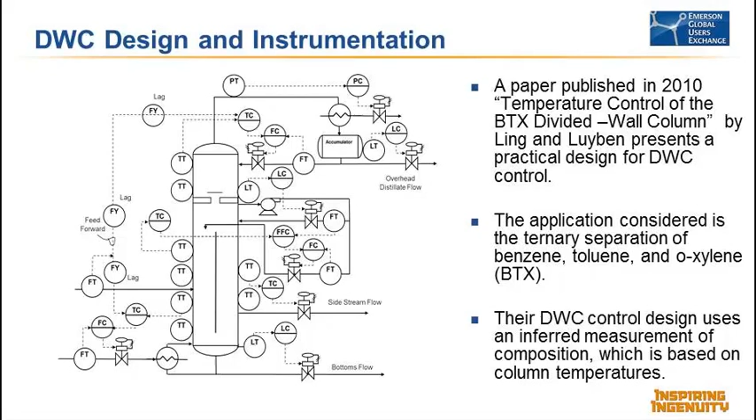For our column, it's about 28 stages, and luckily, we were able to have temperature transmitters on 19 of those stages. We will not use all of them, but we have the flexibility to change very quickly and effectively which stage we'll be controlling off of. So it'll be a huge control study. We've done preliminary looking at which stages we'll want to control off of, but we won't really know the results until we're actually able to run the column.

We'll be using model predictive control on our column. So like I said, by having the wall, you add additional degrees of freedom. So one of the most important stages in the divided wall column is actually the split. So here you'll want to call the column the pre-frac side. So this is where the feed comes in. And then this is the main frac side.

So the side stream product shown here is coming out here. So you have your A product, B product, and C product. The idea behind this wall is to separate the feed and be able to take out the side stream. And so you actually don't want to do the split 50-50 at the top of the wall. We don't know what the ideal split is, but done in modeling, it's about a 25-75% split. But this split is very important for us. And so that's one of the manipulated variables we'll be looking at.

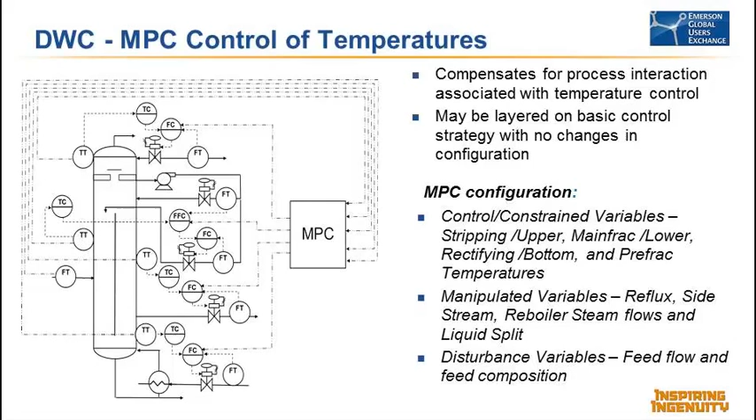So normally you manipulate the reflux at the top of the column, the reboiler steam flows, and then our liquid split, and then the side stream, how much we'll be pulling out here. So it's imperative to have an effective control just because each of the variables interact with each other. And for my project, we'll be looking at the steady state, but further down the line, we'll actually be looking at disturbance variables. So we'll change the feed flow and the feed composition.

Here's a rough flow diagram of what our divided wall column looks like at the pilot plant. It's a 6-inch column, about 30 feet tall. When you have in industry a column that's much larger, you're actually able to internally do that split at the top of the column. But unfortunately, with a 6-inch column, we're just not able to control that liquid level. So what we're doing is we have a total trap tray in the column. So we'll be pulling all the liquid out and putting it into a vessel and pumping that through a heat exchanger just so we'll return the liquid back to the column at the same temperature.

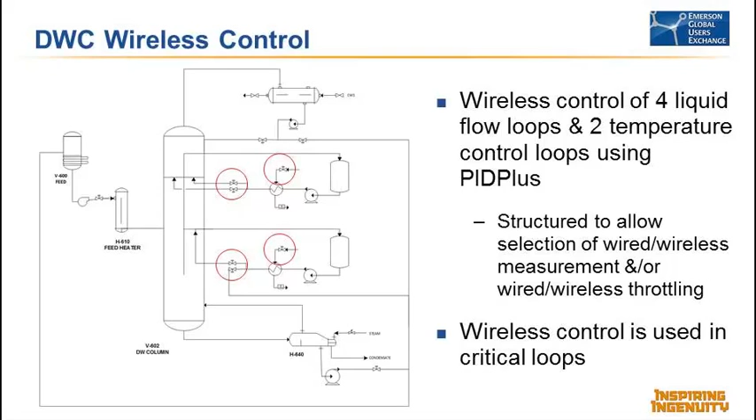And then we'll be controlling the split with 2 control valves, as well as there will be a control valve for the steam. And then for the side stream split, it's the same idea. There's a total trap tray in the column. We'll pull that out to a vessel, pump through a heat exchanger, and then split. It's a continuous process, so our products will just go back to the feed tank. So the red circles indicate that it's actually a wireless control valve that'll be operating. We'll have the ability to transfer between wired and wireless. And so we're using wireless in very critical loops. So we're not afraid of the wireless technology.

So why wireless for UT? Before I left for this conference, our plant manager wanted me to stress at each presentation how much we love wireless at our research facility. So if you run into him, let him know that I told everyone.

We've had a huge history of wireless. Our divided wall distillation will be outfitted with several items, but our pilot plant is over 30 years old. As you can see in the previous picture, we have a lot of equipment out there. And with research, you're constantly changing out. And so by having wireless, it just makes it so much easier for us to install items. It's cheaper for us as well. We're not constantly running conduit. And the flexibility of being able to change. Like I said, we have 19 temperature transmitters on our column. In total, throughout the process, we have 30. And so our operator would still be running conduit if we had to have all of them wired. So we're very, very big fans of wireless at UT.

I hope I set you up well, Willie, to go into the MPC. Good morning, everyone. I was so listening to that presentation that I did not jump in immediately. Very nice introduction. So let me continue.

And at this point, I may remind one figure Bailey told about, those huge savings which the DWC column may provide. 30 to 50% is something incredible. And this concept or invention of that column is from the 40s already. So there are some reasons why this was not implemented. And one of those may be a possibly too rigid solution for instrumentation and control. So definitely part of the strategy is to provide this flexibility from the beginning, and an essential part of the strategy should be model predictive control, because it's really hard to imagine effective column control with no MPC at this time.

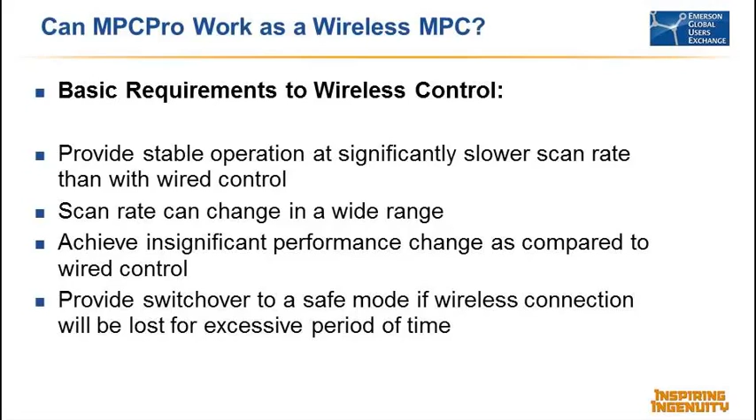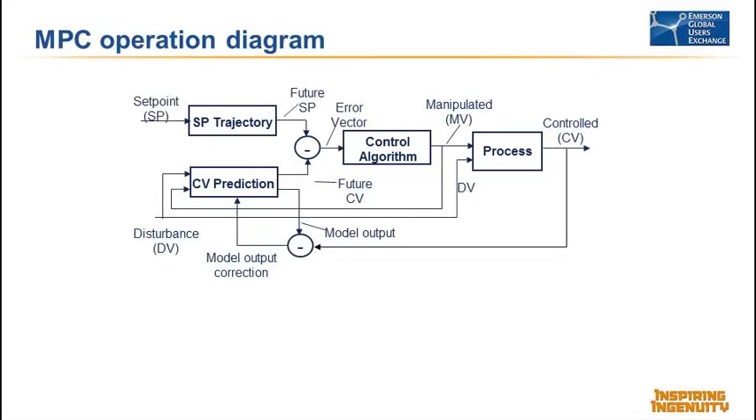What is important for us is to consider how it will behave here. You see, this will be a wireless measurement at this point. So behavior should be somewhat different. Since with wireless measurement we get a transmission and we get the value of the parameter, and then for several MPC scans this value stays. So we cannot compare and correct the prediction. So exactly one rule we need to apply in wireless MPC: do not apply prediction correction until a new wireless measurement value is available.

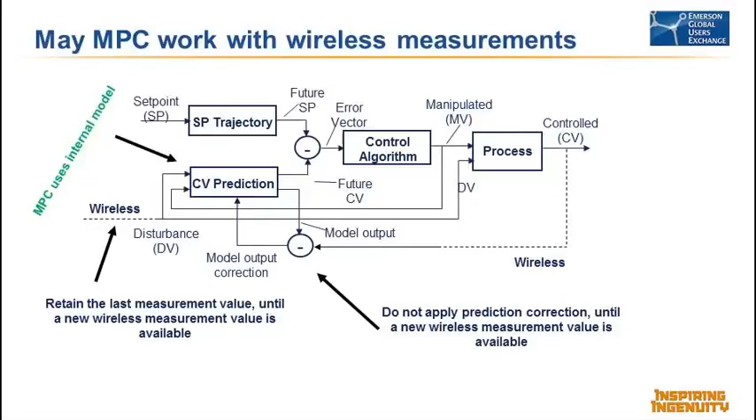Same with input parameters, which in our case are disturbances. And since we don't apply prediction correction, it means that in the meantime, all other MPC scans until a new measurement comes, we need to work based on simulated value. MPC immediately creates an advantage which PID does not have in an obvious way, because it has a model. So when we don't have a measurement, MPC can work on simulated value. After this short consideration, we said MPC is a control technique which can very easily be implemented with wireless control. Let's see on the diagram how it happens in detail.

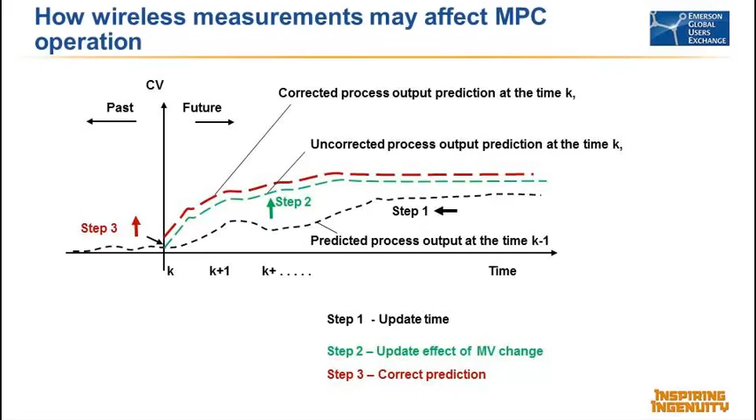Now let's see whether a similar mechanism exists already for cases other than wireless control. One of those cases is when the analog input measurement status is bad. What should MPC do then? In many MPC designs, in particular in our PredictPro, we have a feature where, when analog input or measurement status is bad, MPC still operates a certain number of scans. That means when status is bad, we use the simulated value and MPC performs operation, very similar to what we intend to do in wireless control. Someone who applies MPC knows this very well, that when we configure MPC, we need to set this feature.

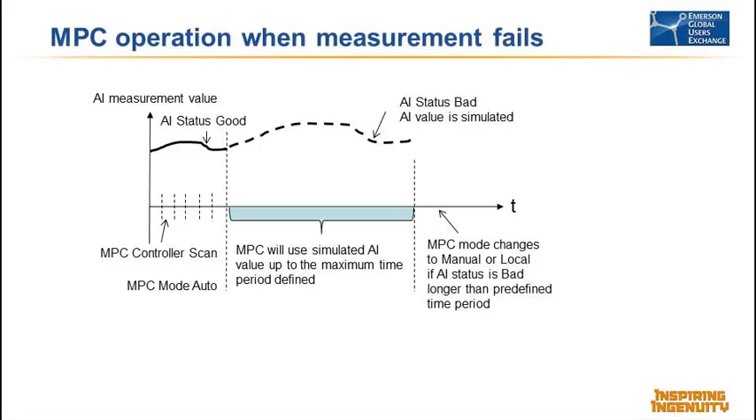Next, very similar MPC behavior we observe with lab measurement. Lab sampling is a value which is taken at a much slower pace than MPC operation. Within one lab sample, we may have 10 or even more than 10 MPC controller scans.

And definitely we cannot use those lab values for MPC model update. So what we are doing here, as shown here, is that we take a new lab value, we update the MPC model at this point, and then we use the simulated value of that measurement, of that process output, and MPC operates in such a way.

So lab measurement is a very good analog to wireless measurement, and it also has the feature that it is not regular. We get measurements at a much slower pace than MPC operation, and as I said, it's really very similar to wireless. So now we are coming to the conclusion that to develop wireless operation, we need to develop a wireless measurement which will conform to those rules.

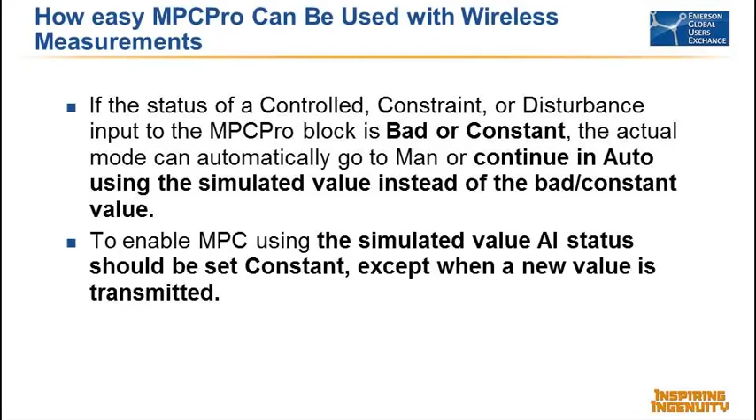So first of all, if a measurement is transmitted, status should be good. Otherwise, it should be constant. That constant status could be bad, but that doesn't really sound good in principle. What we assume is more proper is constant in wireless control. So if the status is constant, MPC will be working based on the simulated value. And that is the principle of wireless MPC operation, provided the analog input really delivers that measurement status. And that is exactly what we need to do.

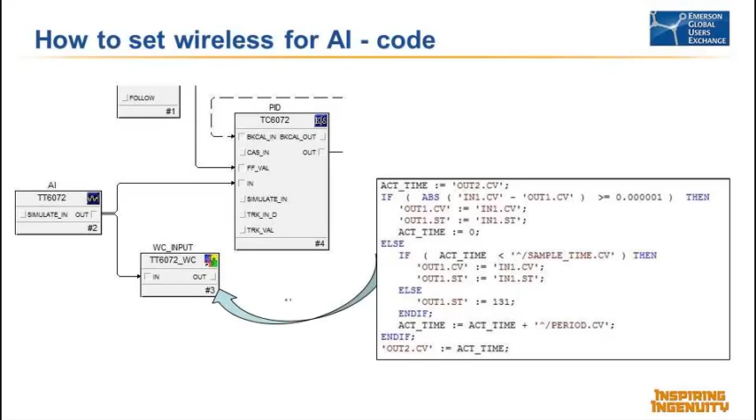At the PID loop level, shown here, we develop a special extension of the original wireless measurement, which will be used in MPC and generates status in the way I discussed a minute ago: status will be constant when there is no new measurement, and status will be good when a new measurement is transmitted. We need to set some additional parameters or settings which fortunately are present in PredictPro. That's exactly what we noticed after discussion.

The so-called SIM time factor tells how long MPC replaces the measurement by the simulated value if the measurement status is failed or constant. That SIM time factor is measured in time to steady state, so it's a very significant time, even for wireless control, because time to steady state is usually 3 times the process time constant plus dead time. Essentially, wireless measurement should be delivered in a much shorter period of time.

In normal MPC operation, over time to steady state we have 120 scans. We tested with a wireless measurement period of 16 MPC scans. That's still significant, and I think we might extend it quite a bit. So these settings are in PredictPro already.

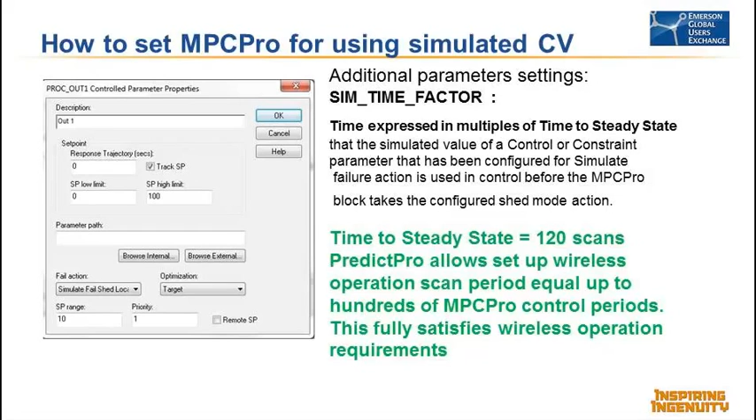Well, that is a summary of what we discussed. I will not repeat it. In short, new value, status good; where no new value is transmitted, status is constant, and the MPC uses the simulated value. That is the summary of the concept. Very simple and clear, and fortunately all the features in PredictPro were already there, so it was easy to assemble.

In general, we need to set up that maximum SIM time factor to account for the maximum transmission period. If we have several wireless measurements which work with MPC, the safe way would be to add them together and set up this SIM time factor as a sum of transmission periods.

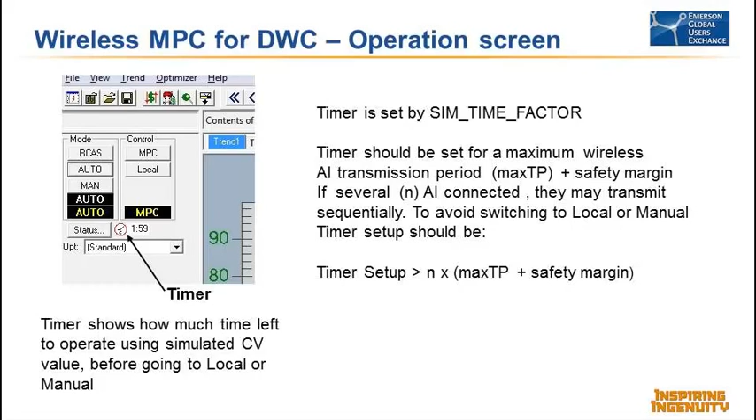Okay, now we go to MPC Classic. MPC configuration for wireless is exactly the same as for normal MPC. So I will not go into detail, just let me mention a few general rules: we select the MPC function block and configure controlled, manipulated, constrained, and disturbance variables one by one, setting the basic parameters for every variable, and, what is really important, setting the connection of the function block to the source of the signals.

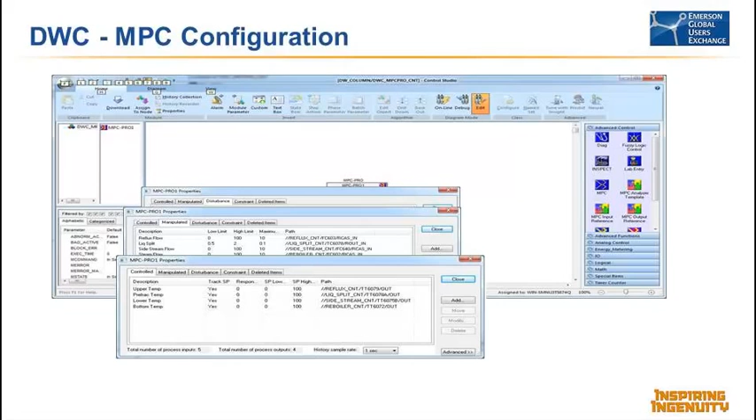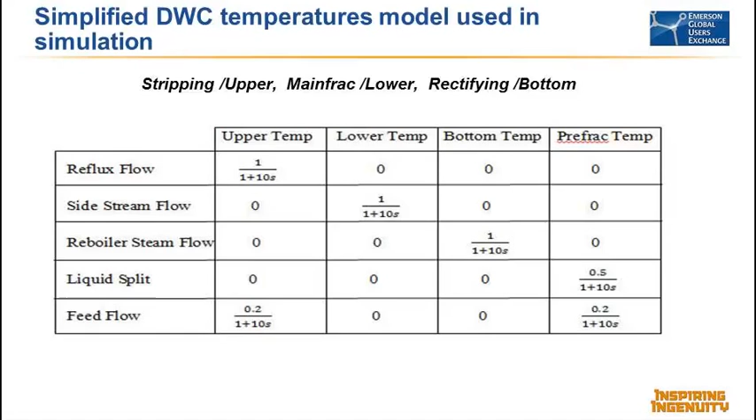The model was developed using a wired connection in simulation. So there are many issues to discuss about how we develop a model from wireless instrumentation. That is a separate issue. But at this point we may say that we use the same model for wired control in case we switch between wired and wireless control. The model doesn't differ.

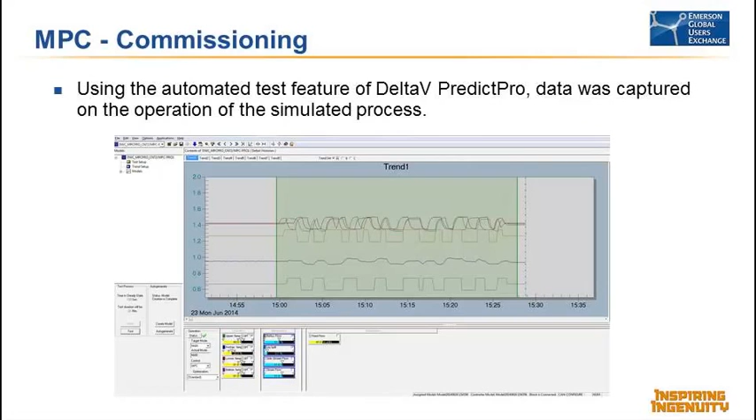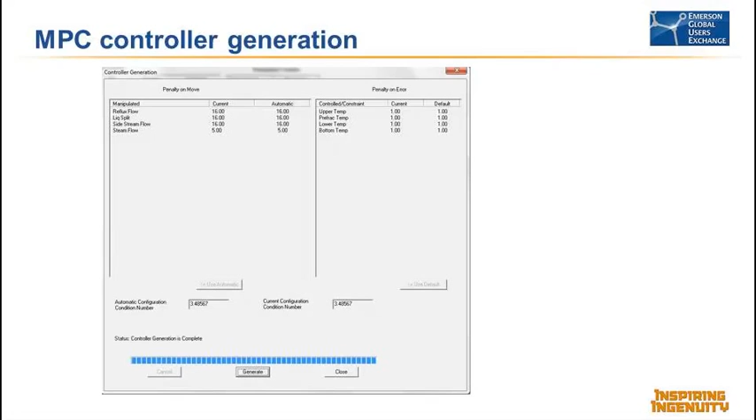We perform standard testing. This is automatic testing. We go to model review. From model review, we go to model validation or verification. Then we go to controller generation, and everything is performed automatically in PredictPro. But with those automatic procedures, it's very important to keep an eye on all those steps, and it's worthwhile to know what the results are. Finally, this is the control strategy, which is set on the optimizer screen.

Essentially, the strategy is very simple, just for temperature. I use kind of a generic name. Bailey is not happy with that, but we name those in MPC such way: upper, prefrac, lower and bottom temperature, which we need to keep on target here. And that's as simple a strategy as we can imagine.

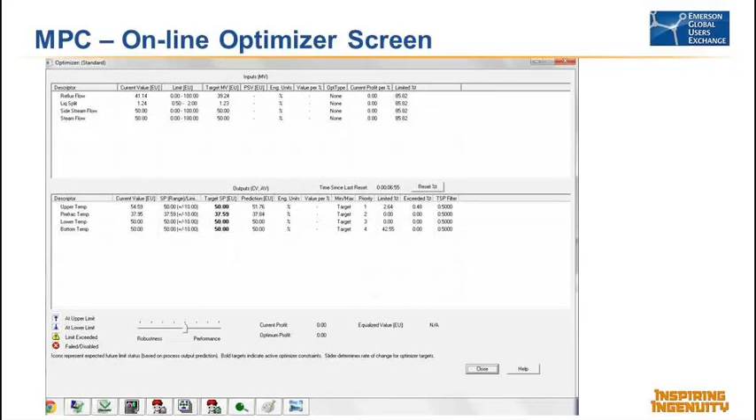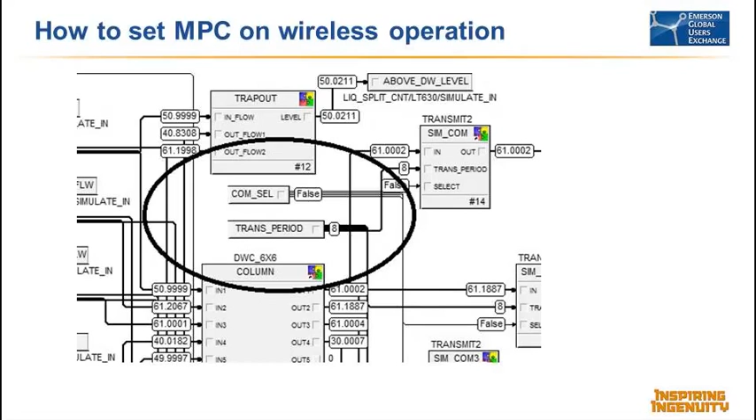Since we worked at this point on simulation, it can be set for operation in wired mode and wireless mode. So to set it in wireless mode, we may also select the maximum transmission time, which at that point is 8. In our testing, we used 8 and 16 MPC scans.

So what we observed when we switched to wireless control is shown on the screen. You see, this is the step response, which in general, I would say, does not differ too much from wired control, but we notice some small bumps here. And that's easy to explain when we know the principle of operation: from the beginning up to before the bump, MPC works on the model.

At the point of the bumps, a new measurement is coming and the model is updating. This simulated process output is updated. So this is why bumps are coming, and that's something we need to live with. There is no other way to avoid this. Effectively, performance might be a little smaller, but we measured integrated absolute error automatically in simulation. And it happens that the performance, as I'll tell later, doesn't change so much.

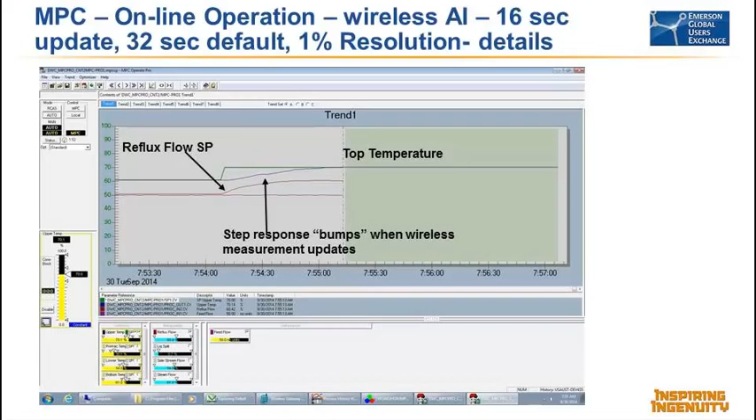Now, this slide shows a real measurement value, which comes from wireless. See, this measurement is steady, this is steady, this is steady. We work on the simulation up to that point. At that point, a new measurement is coming, which is why we notice a small bump in that simulated trajectory. Again, from here to there, we worked on simulation. It's hard to imagine that MPC can work on that constant value. So really, everything works like in theory here.

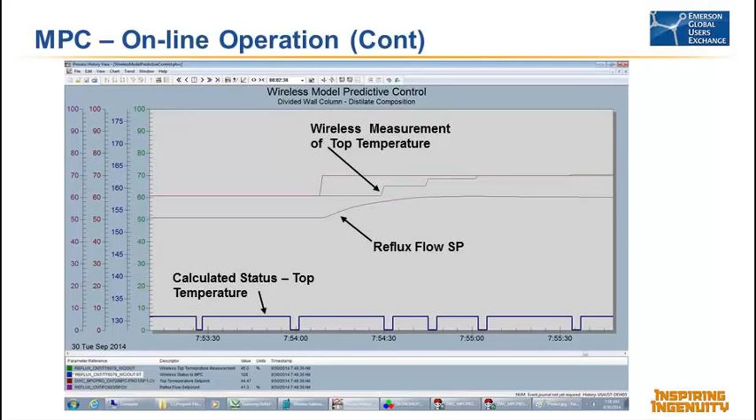Well, and now we are coming to the conclusions. We observed stable operation using wireless control for a significant wireless time period. As I said, we tested 8 and 16, and stable operation might definitely be provided even for a longer transmission period. The process model for wireless MPC is even more important than for wired MPC. This is something we need to realize at the start: we are happy with the performance of operation, and we know that model quality for MPC in general is important.

For wireless it is even more important, because MPC works a significant number of scans; let's say, if we say 16, it's like 90% or 95% of operation is based purely on the model. So model quality should be really high. MPC is really quite well prepared for wireless operation. We just need to put in a mechanism for handling the status of the wireless measurement, which corresponds to MPC proper functioning. That's all we need to do.

And by the way, it's just better prepared than PID because the model is there. And with wireless MPC, in general, we are adding a new feature to the product, no doubt. Okay, Terry, can you summarize?